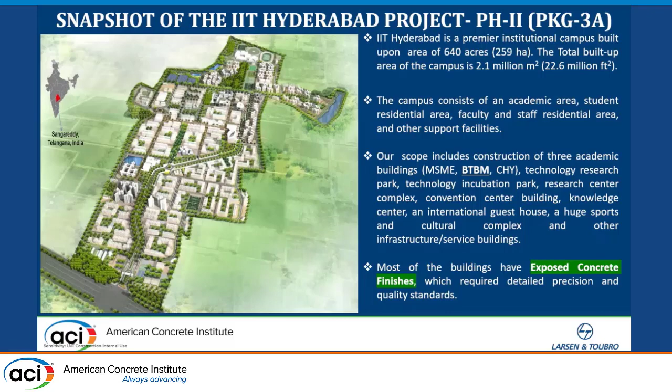The beauty of this campus is that every building we constructed has exposed concrete finishes, which doesn't require any painting or plaster. You can have a glance of this. Very good - that is the building shaped like DNA.

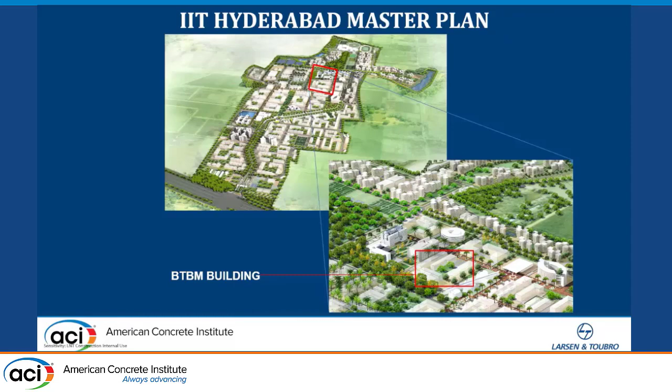This is the IIT campus in which the BTBME building is located. The owner is Indian Institute of Technology, and we, Larsen & Toubro, are the main contractor and concrete supplier. Arcop Associates is the architectural firm based in Delhi. Tata Consulting Engineers is the PMC based in Mumbai. Technical Project Consultants are the structural consultant based in Noida. This project duration was 18 months, and the floors are G+4.

This is the BTBME building. This building has a design concept of GRIHA, that is Green Rating for Integrated Habitat Assessment, and complies with energy efficiency, safety and security compliance, and barrier-free design.

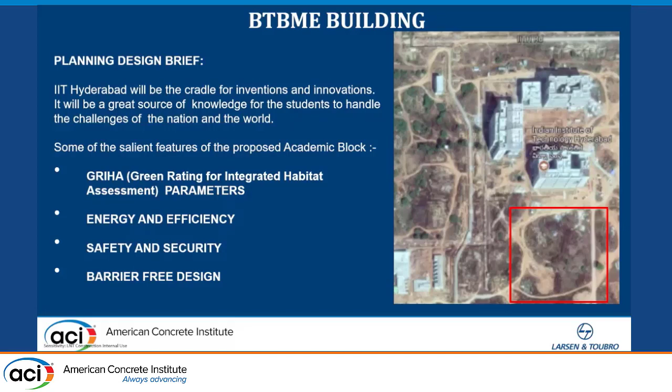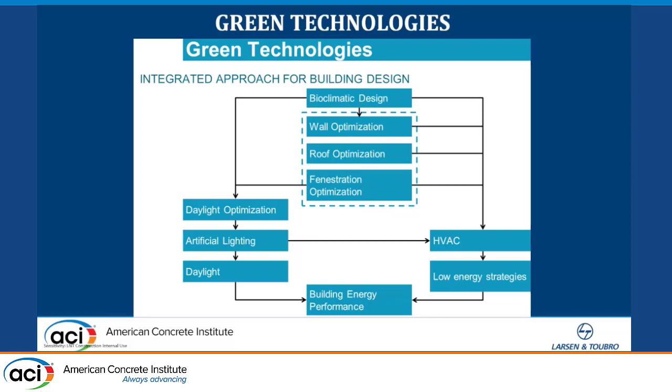Basically, it is compliant with green technology and has several parameters like bioclimatic design, wall optimization, roof optimization, fenestration optimization, daylight optimization, and artificial lighting, all of which add to the building's energy performance. It also has barrier-free design, easily accessible for regular people as well as physically challenged people.

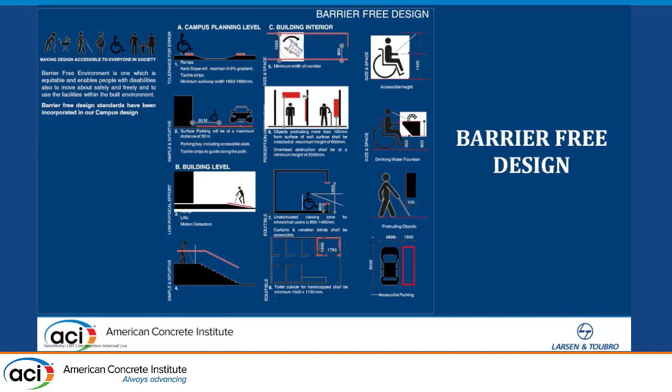Now coming to the basic concept of the BTBME building. BTBME stands for biotechnology and biomedical. Biotechnology is the use of an organism or a component of an organism or other biological system to make a product or process. Many forms of modern technology rely on DNA technology. Biomedical engineering includes bioinformatics, making devices to collect, analyze, and interpret biological data such as DNA analysis.

So the building concept and shape is inspired by a DNA molecule. A DNA molecule is made up of two linked strands that wind around each other to resemble a twisted ladder in a helix-type shape. Each strand has a backbone made of alternating sugar and phosphate groups. This double helix shape of DNA symbolizes the interconnection between faculty and students.

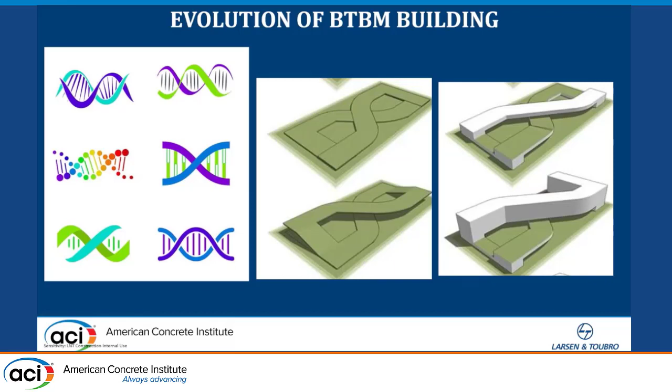This is the evolution of the BTBME building - how we started with the DNA molecule, and these are the steps, final steps taking place. This is the final evolution. So biomedical has two wings, and biotechnology has two wings.

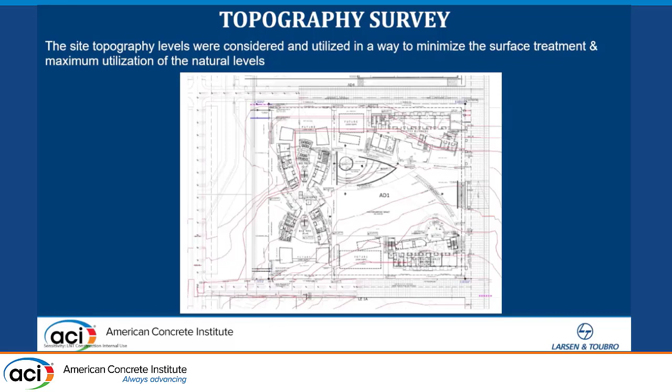This topography survey was made to minimize the surface treatment and optimize the available levels there. The site plan concept area's main focus was to create a more green zone. And again, an open air auditorium is there.

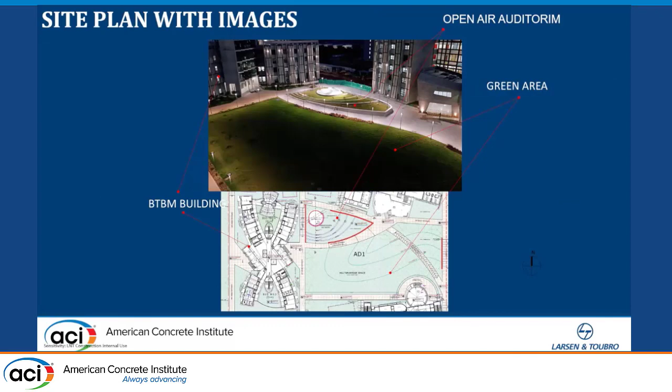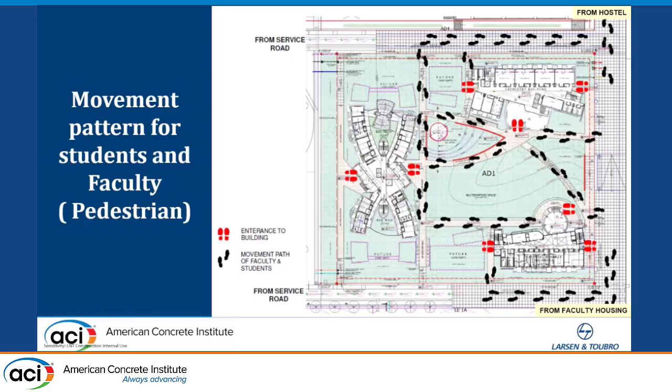Landscaping plan is extensively designed, and we have got pathways to have this green as a visual soother for the inhabitants.

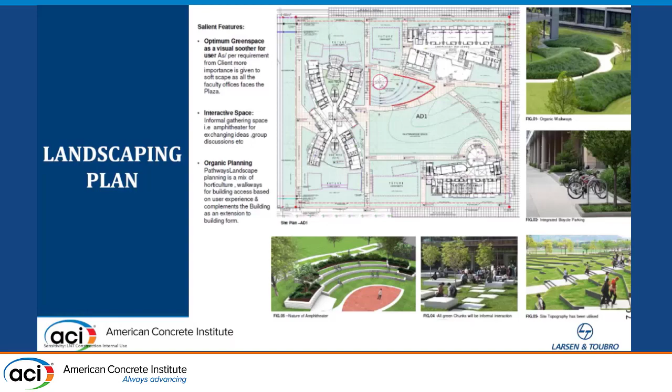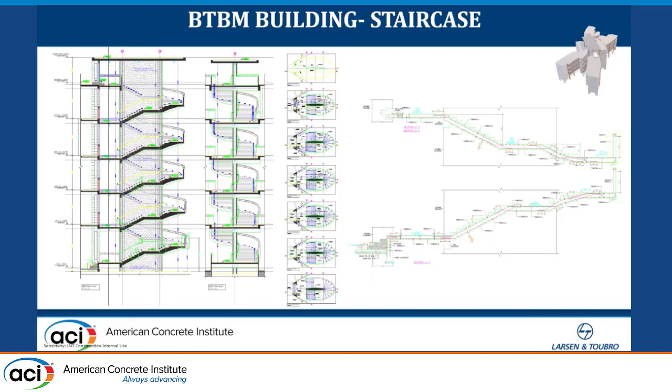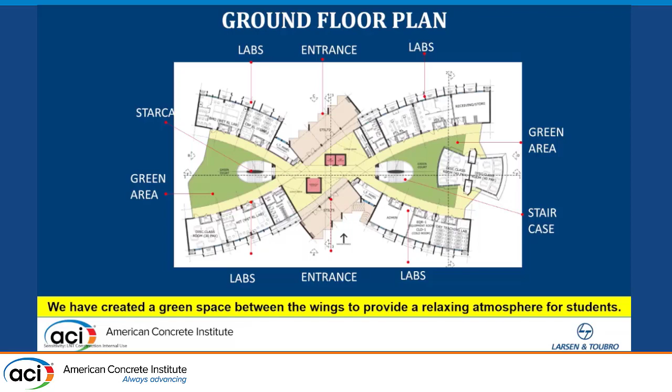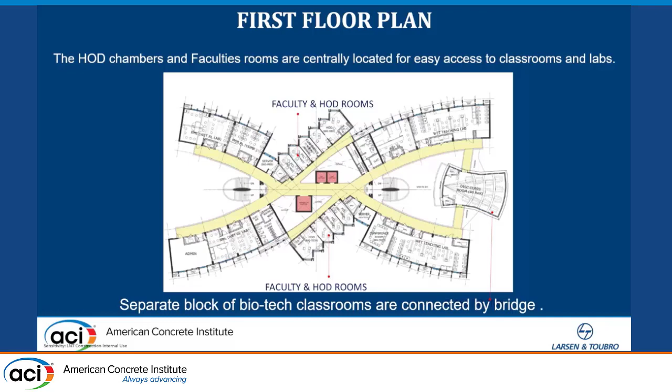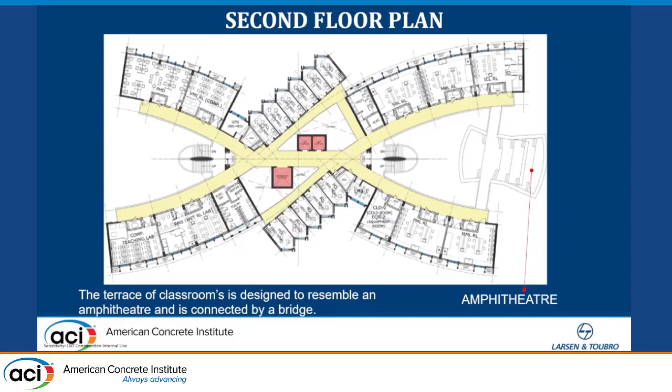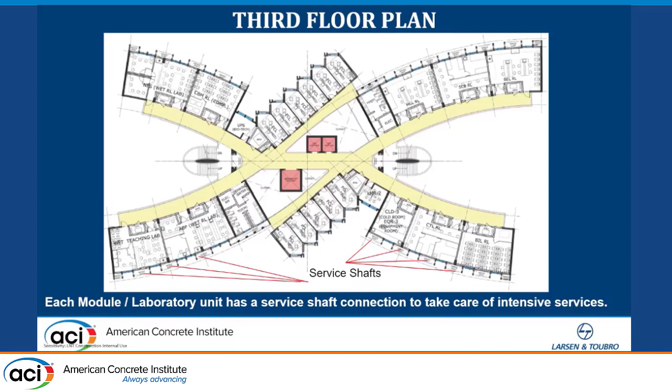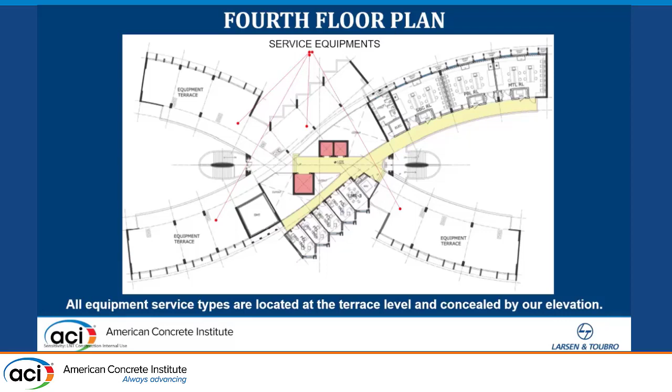This building elevation is designed with a combination of precast panels concealing the electromechanical services, and double glass unit with part openable panel.

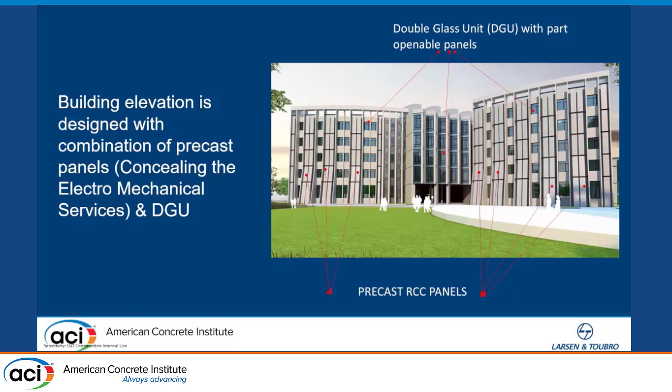Data sheet: we are having G+4, total built up is 90,000 square feet. The structure is beam frame system, and aerated cement concrete blocks are used for masonry.

Flooring is predominantly vitrified tiles and granite. Classrooms have hardonite flooring. For internal finishes, walls have plaster and paint surface, and ceiling has cement plaster, paint

and mineral fiber false ceiling. External finishes are exposed architectural concrete finish with grooves. Fenestration is double glass unit, and all electromechanical equipments have design build on design basis reports, with special access for physically

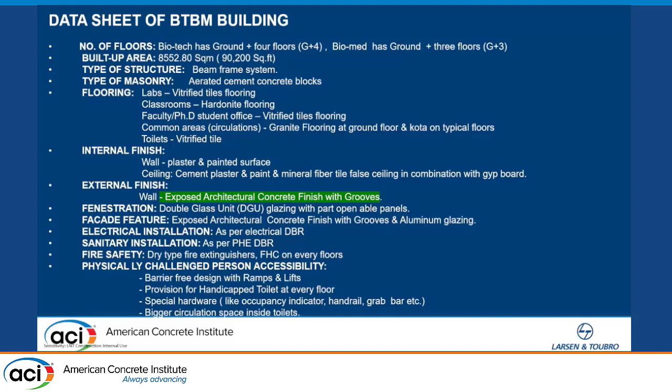challenged persons. Further information: both wings - biotechnical has classrooms, dry labs, wet labs, research labs, and biomedical has the same facilities.

Now we can come to the difficult portion of this building. There are two complexities there: one is technical, other is external. So technical complexity was there.

Complexity in construction: 2D curved walls. All walls are curved, having 70-degree inclinations. Next is fin walls so slender, hardly 150 to 180 mm thick.

And every exposed wall has a form finish with grooves. We have spiral staircases located on both sides, that is 3D spiral staircases, and precast panels concealing all electromechanical services.

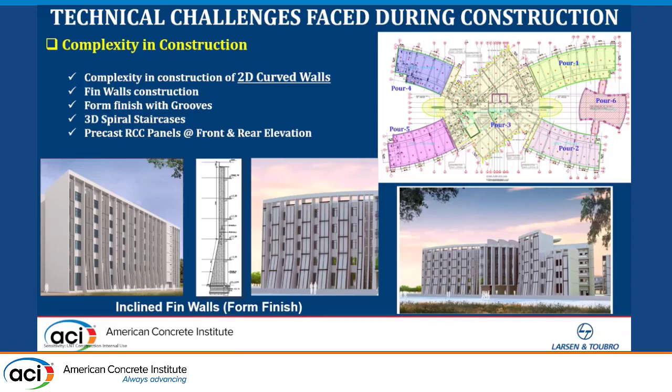So you can see, elaborate further, you can see the ongoing construction. This RCC parapet wall with grooves and curves. This shear wall, on the right side.

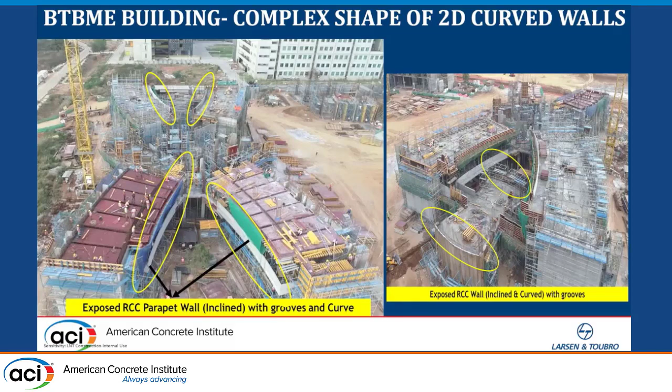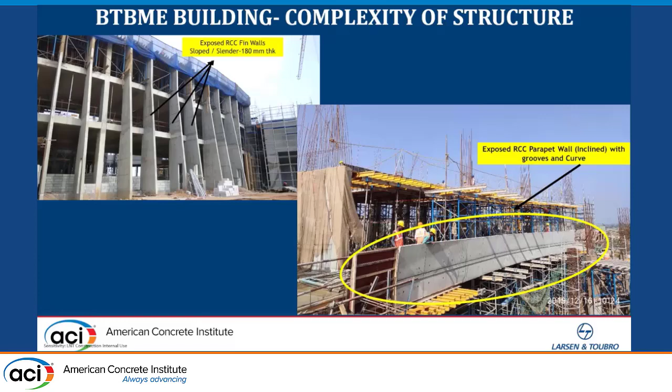You can see the slender, this fin wall, 180 mm thick. This RCC parapet wall with grooves and curves. And this was the most challenging, the spiral staircase, the 3D spiral staircase.

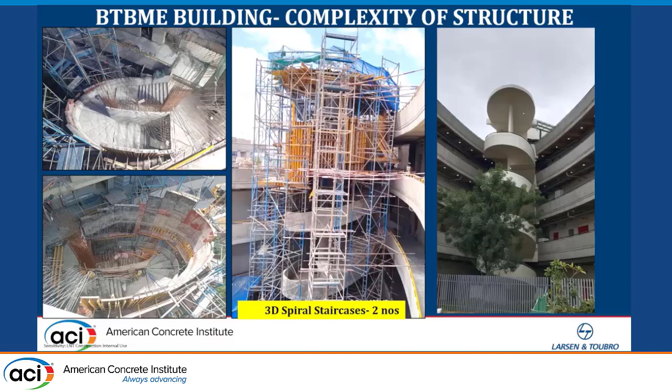Apart from the technical challenges, we faced external challenges in the form of COVID-19. We faced this onset of COVID two times: 6 months in 2020, and another 4 months in 2021.

We kept an isolation ward, and had a thermometry system for staff. You can see on the left hand side around 3,000 laborers we had to send off because they hesitated to stay in the campus during COVID time. We then had to remobilize them, so it was not an easy task to get back

to schedule. It hampered productivity, which was at an all-time low, and we had to go for staggered work shifts, maintain social distancing, amid disruption of the supply chain. So we overcame all challenges, and finally we constructed the building.

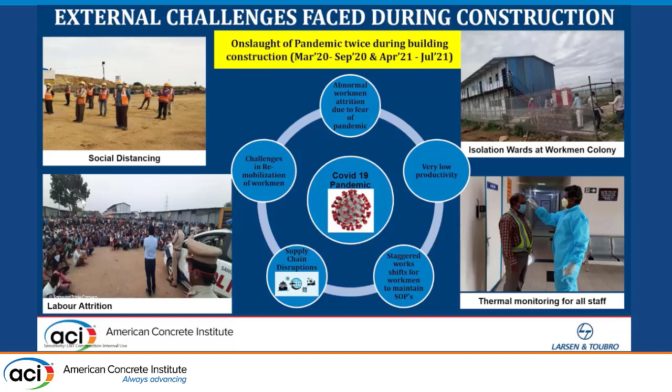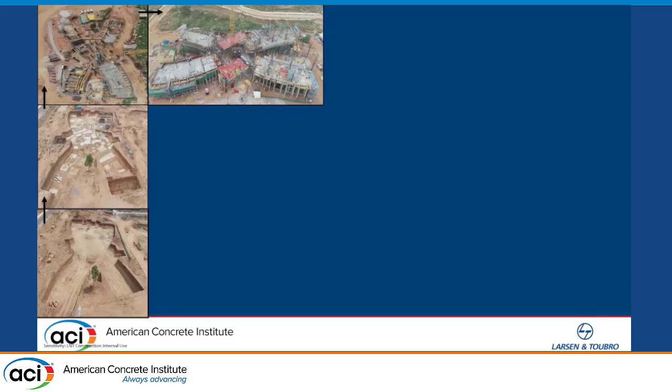So the journey of these iconic structures, I can show you: this is excavation stage, this is mud concrete, this is grade slab, this is first floor slab, 3 floor slabs, this is the top view, this is elevation, this is inauguration of the building, and this is the completed view of this BTBME building.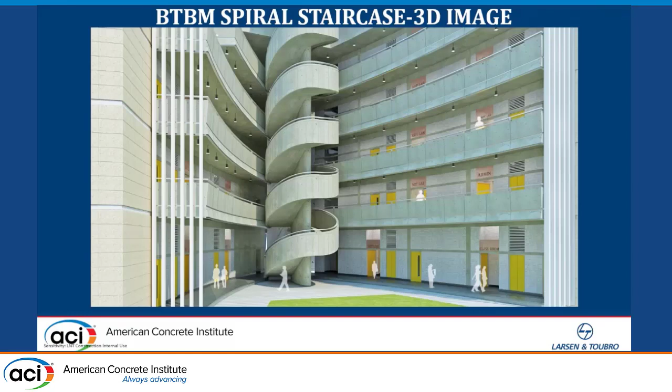This is the spiral staircase rendered view, and this is the completed view of the spiral staircase. And this is the top view of the terrace.

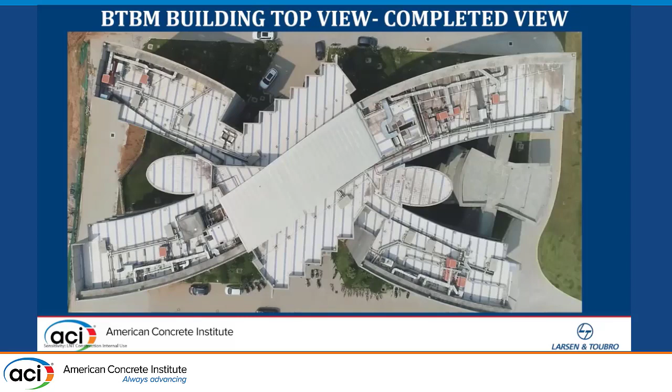So how did we maintain quality here? We sourced fly ash and cement from a single source to have uniform concrete shade. Next, we had an on-site concrete batching plant to maintain better quality control.

And we installed a dedicated reinforcement steel plant and automated decoiling, shearing and bending equipment to address the requirement of curvilinear shapes. Plywood uses were restricted to only 3 repetitions for better finishes, and thorough checking and precise detailing were done to ensure grooves are perfectly in line with architecture requirements.

We adopted a BIM model to have better insight on interface issues.

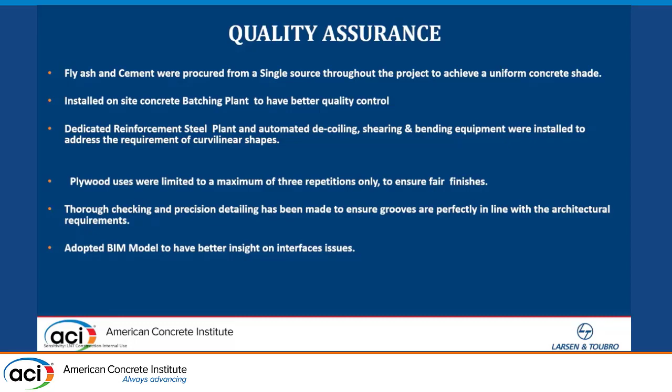As for rewards and recognition, we got a 5-star rating from British Safety Council and Sword of Honor. We also got the RISPA Gold Award for this project. From Indian Concrete Institute we got the Best Outstanding Structure Award, and this is an appreciation from the client for the best quality form.